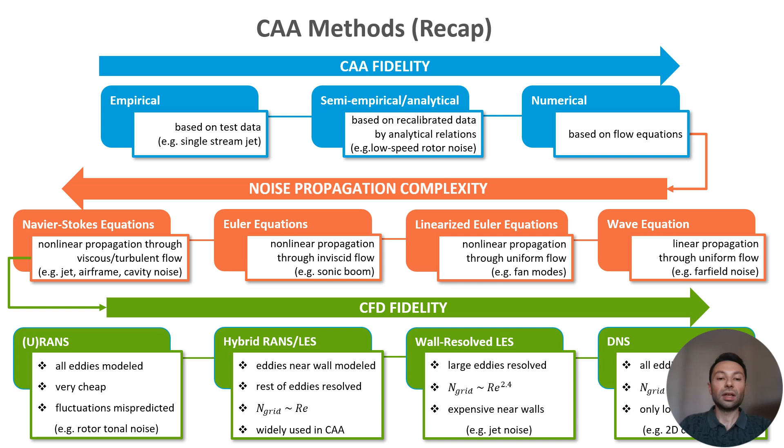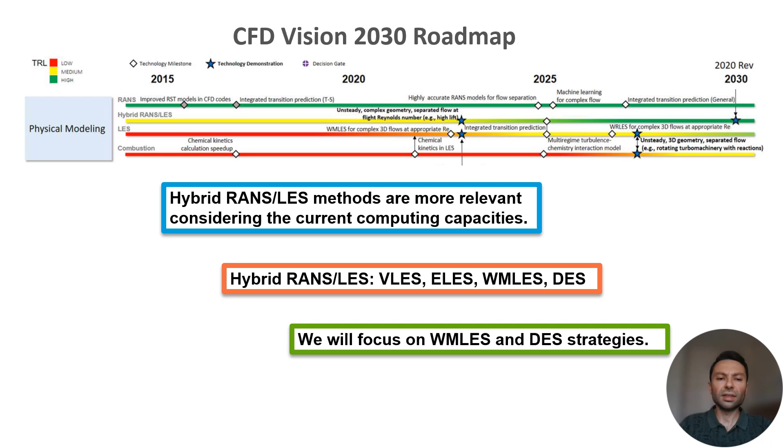Instead, given the current computing capacities, hybrid methods appear to be more suitable for such CAA simulations. This is also supported by the CFD Vision 2030 roadmap shown on the slide. The main hybrid methods are very large eddy simulation, embedded LES, wall-modeled LES, and detached eddy simulation. In this video, we will focus on wall-modeled LES and DES strategies.

Let's start with wall-modeled LES. We know that LES resolves large energetic scales, which become smaller progressively close to solid surfaces as the Reynolds number increases. Therefore, resolving energetic eddies everywhere is not feasible for wall-bounded flow simulations. Instead, the wall-modeled LES approach models them in the inner layer, where RANS models are well-tuned and inexpensive.

In principle, wall-modeled LES solves the flow field starting from the inner layer edge, where the required fluxes are imposed as boundary conditions. These boundary conditions are provided simultaneously by either direct estimations based on RANS concepts or performing RANS on a much finer grid within the inner layer.

A disadvantage of this method is that it may cause a mismatch of skin frictions at the interface, which is called the log layer mismatch problem. The main improvements to this method in literature are regarding solving this particular problem.

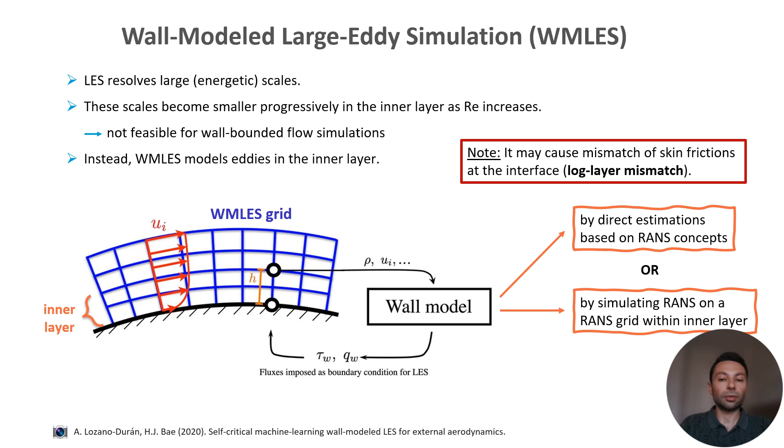Let's continue with the detached eddy simulation. DES is entirely based on RANS equations. It divides the computational domain into two separate regions, RANS and LES. In the RANS region, which is simply inside a boundary layer, DES models all the structures as RANS does. In the rest of the domain, which is the LES region, DES resolves the eddies.

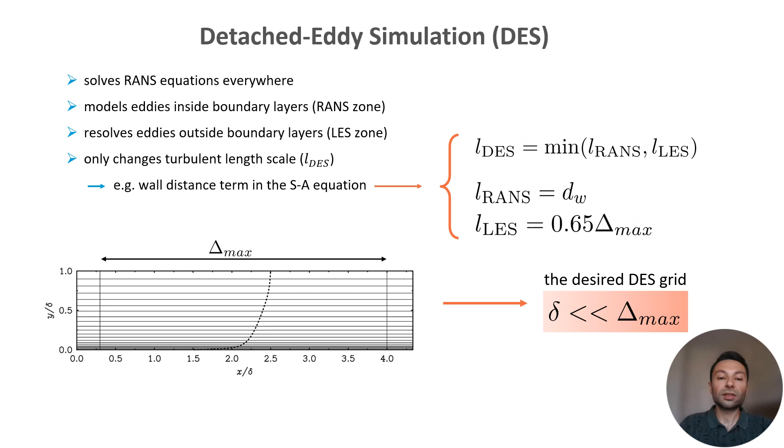During the simulations, DES determines these regions by switching the turbulent length scale as shown here. This length scale is designed to be the minimum wall distance in RANS regions and the maximum cell size, delta max, in LES ones. In this way, a RANS model equation behaves like a Smagorinsky model in LES regions. To achieve this, the desired DES grid should be created such that the boundary layer thickness is much smaller than delta max, as shown in the figure.

DES was initially designed for specific flow problems, where an attached boundary layer is massively separated from the surface. Modeling attached boundary layers reduces computational expense when compared to LES. On the other hand, resolving separated fields provides more accurate results than RANS. The important point here is that DES is good at massively separated flows, where large eddies dominate the field, such that the grid resolution by delta max suffices for eddy resolution.

However, it also has some disadvantages. DES makes the RANS-LES switching sharply, which causes an uncertain region called the gray area that is neither RANS nor LES. Besides, this switching is highly dependent on grid quality. Let's analyze some cases to better understand the defects of DES.

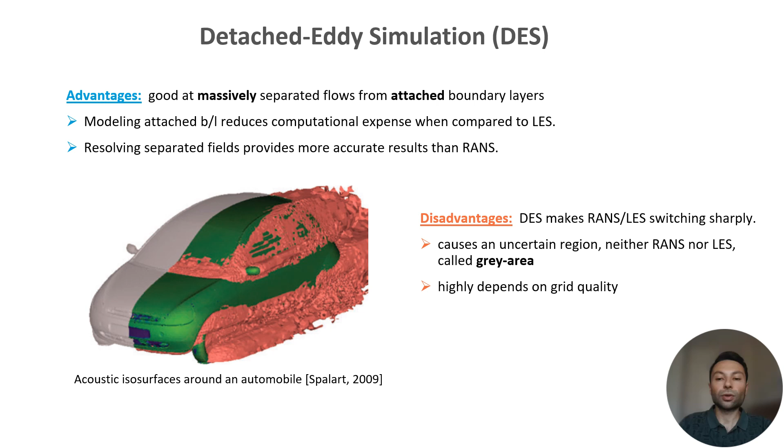This is case 1, where the gray area is outside the boundary layer, as shown in the figure. Here, delta max is greater than the boundary layer thickness, which ensures that the RANS region remains inside the boundary layer. This is the case where DES works properly.

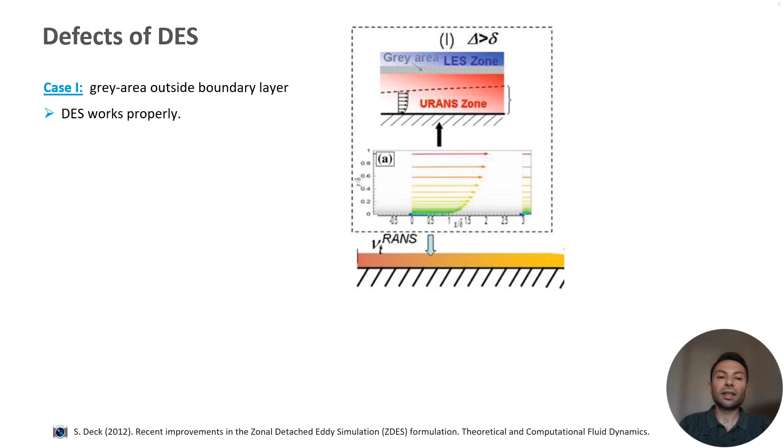Now you see case 2, where the grid is not properly designed for the thickening boundary layer. In this case, the gray area moves inside the boundary layer and consequently causes an activation of the LES mode in regions having insufficient grid resolution. Since some eddies couldn't be resolved correctly, DES reveals less eddy viscosity than expected, which is known as the modeled stress depletion problem. This may subsequently lead to an early flow separation, which is called the grid-induced separation problem.

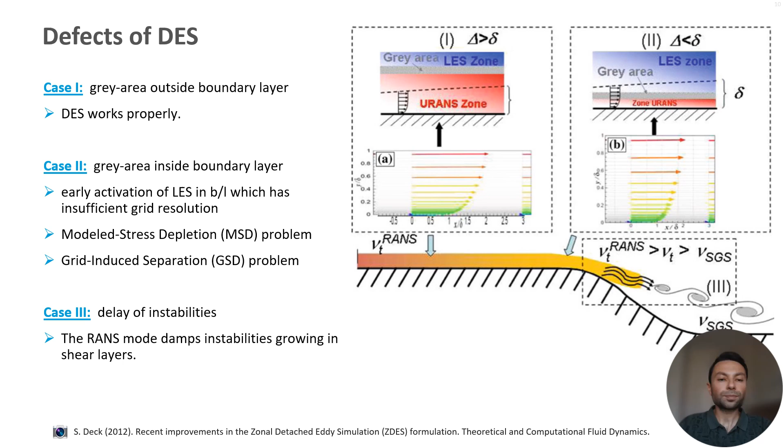Another defect is related to the delay of instabilities, as demonstrated in case 3. Here, in the early shear layer regions, which are very close to the surface, the RANS mode is active because grids are usually designed for attached boundary layers. Inherently, shear layer instabilities are expected to grow in the corresponding region. However, DES computes larger eddy viscosity due to its RANS mode, which eventually damps these instabilities. This is known as the delay of instabilities problem.

There are some modifications proposed in literature regarding these defects. The most popular one is delayed DES or DDES, which cures the gray area problem regarding case 2. Recall that for an ambiguous grid, where delta max is less than the boundary layer thickness, as shown in the figure, LES is activated earlier than expected.

Here, DDES uses a delaying function, fd, to prevent the activation of LES in attached boundary layers. This function is based on the instantaneous local flow variables and their gradients. It takes 0 when the flow is attached, so that DDES behaves as RANS as expected. For the rest, fd becomes 1 and DDES takes the same form as DES. In this way, the grid dependency is reduced.

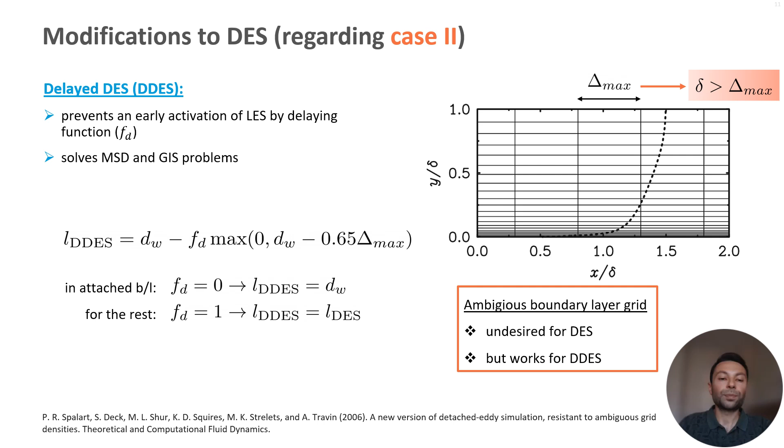As a solution to case 2, there is another approach called improved DDES or IDDES. It is a blending of wall-modeled LES and DDES. Here, DES-type wall-modeled LES implies that the RANS region is restricted to the inner layer instead of the entire boundary layer. It aims to increase the eddy resolution level in cases of inflow turbulent content. Otherwise, it behaves the same as DDES.

IDDES also solves the log layer mismatch problem by its elevating function, which prevents an excessive reduction of the modeled Reynolds stresses in the gray area. IDDES can be preferred in flow fields that involve reattachments, as appeared in the cavity noise problem.